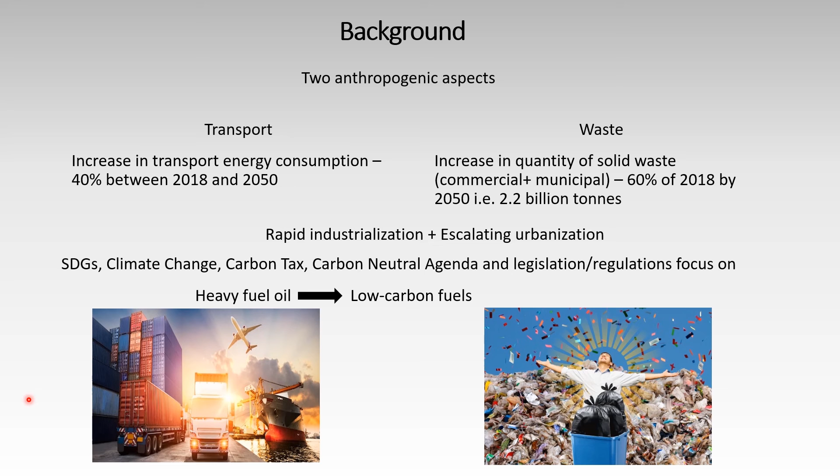Transport energy consumption. The figure shows the energy consumption by different sectors. As you can see, the second largest user of energy is the transport sector, consuming more than one quarter of the global energy.

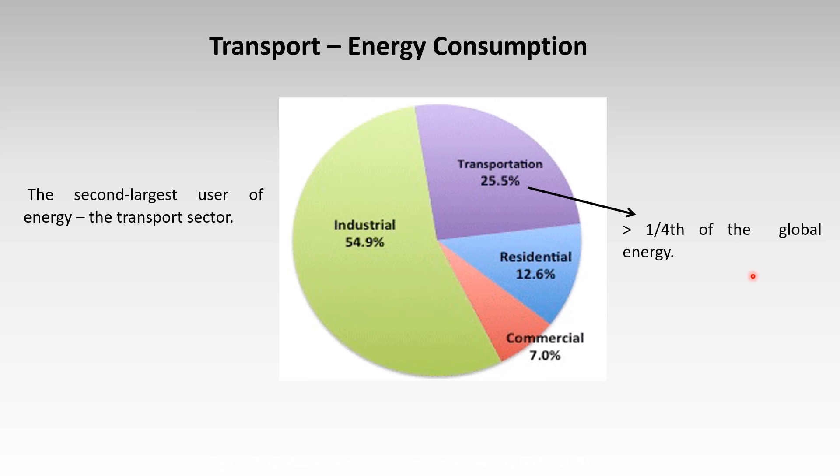Transport energy sources. This figure shows global transportation sector delivered energy consumption by energy source between 2010 and 2040. As you can see, the majority of transport's power is met by these unsustainable compounds.

This is set to increase by 30 British thermal units between 2020 and 2040. Here you can see the difference of 30 British thermal units, this is 2020 and 2040, and here is the different slice.

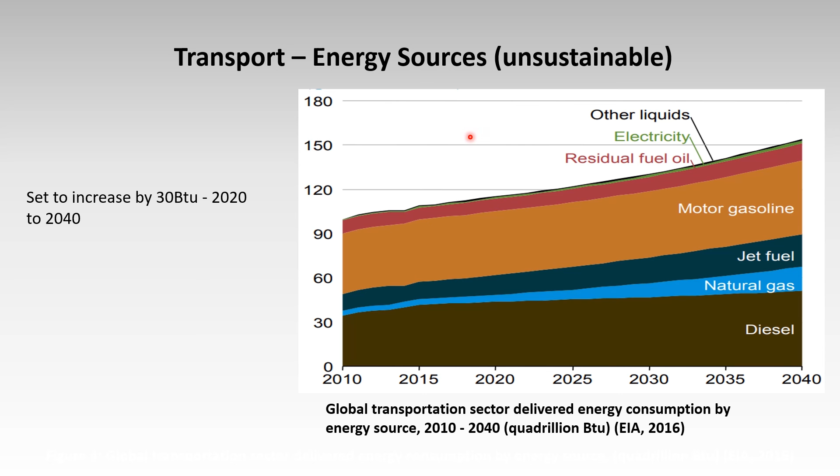Waste footprint for 2016: 2.01 billion tons of solid waste were generated, amounting to a footprint of 0.74 kilogram per person per day.

Here is the rate of waste increase. The 1.3 billion tons of waste produced per year continues to rise with the increase of global population.

In low-income countries, 90% of the waste disposal is unregulated, openly dumped or openly burnt, and such practices create serious health, safety and environmental consequences.

Solid waste energy. Here is a typical incinerator. You can see that incinerators can reduce the mass of solid waste by 80 to 85%, and the volume of solid waste by 95 to 96%.

And yet recover energy from the waste as well. The net calorific value of typical solid waste ranges from 4 to 35 megajoules per kilogram.

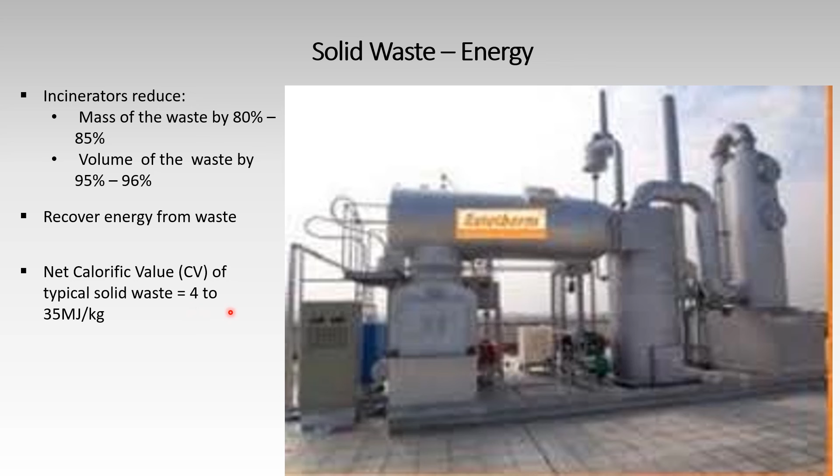This is the schematic of solid waste incineration. Here is the bunker, where waste is dumped. Firing grate, incineration happens here. The boiler, where water boils, and then steam enters into turbo alternators and then transfers into another chamber and converts into electrical energy.

At the bottom you can see ashes and metals, the byproducts of incineration. We will discuss their fate later in the presentation. This is the separation particle chamber, where separation of gases and vapors happens, and then they find their way out of the stack.

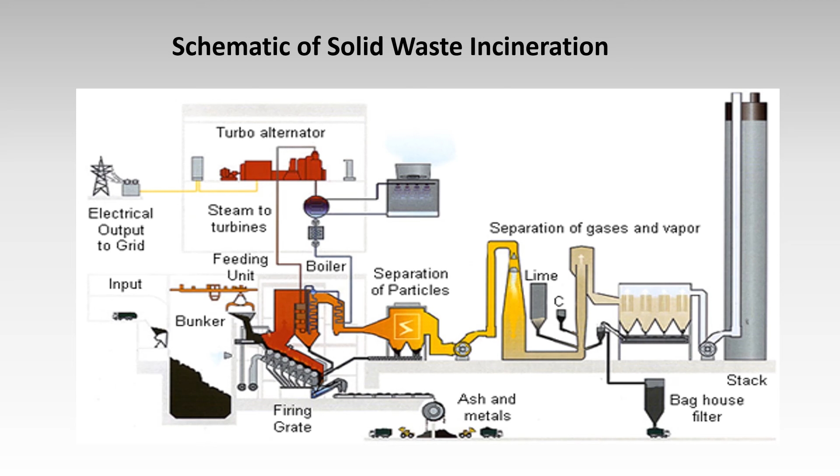Problematization and knowledge gap. As we have seen, the transport sector consumes energy. Waste can yield energy if incinerated.

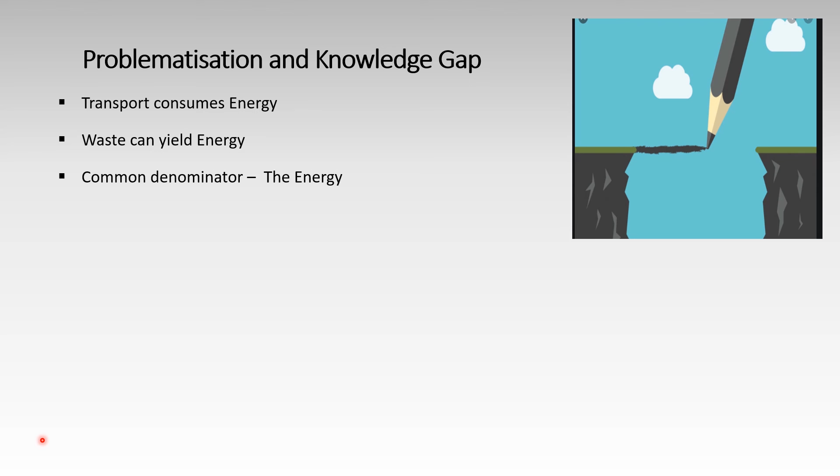The common denominator between the two is energy. So the idea of tying the two sectors, transport and waste, together via the thread of energy seeks attention. So the point is, can something be done here?

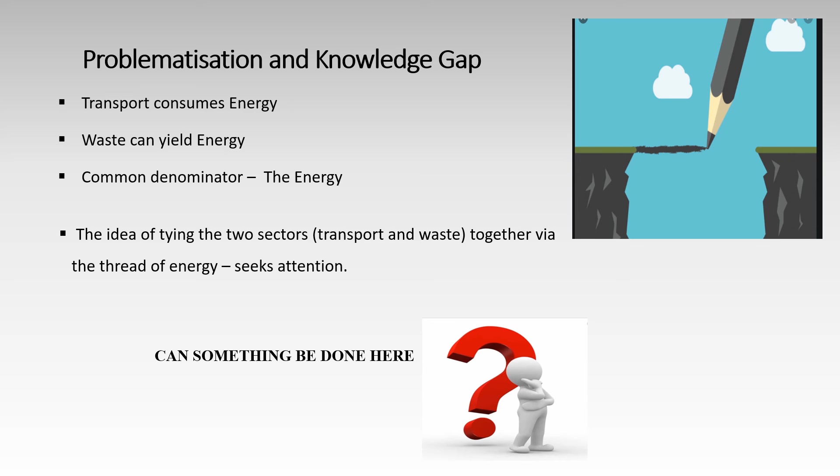Here is the aim: the coupling of the two sectors, transport and waste, with the one stone being energy—thus killing two birds, transport and waste, with one stone.

Objectives: the aforesaid aim has been achieved by the following objectives. Firstly, establish or outline the potential of combining the three sectors, waste, energy and transport. Then create an account of advantages and challenges of the combination. Further, investigate the combination via the lenses of sustainability, sustainable development goals, and climate change.

The innovative idea: waste incineration, energy as an output, energy as an input in the transport sector. You can see one sector can yield energy, that is the waste, and the other sector needs energy, that is transport. So we can put these two sectors together into a relationship via output and input of energy.

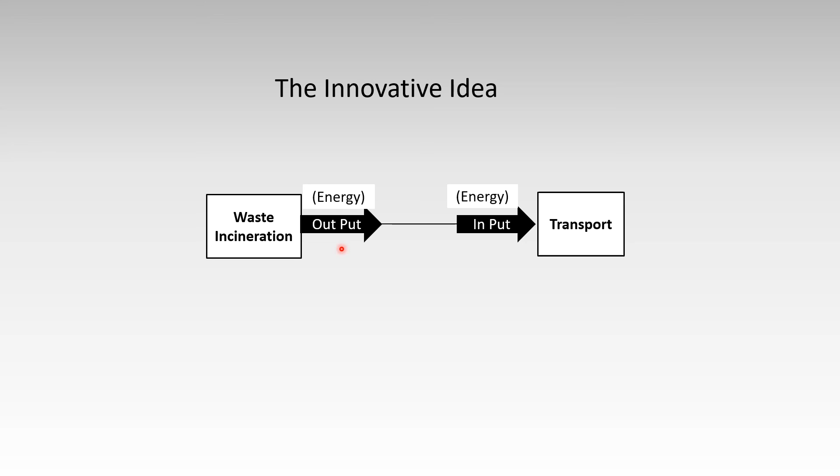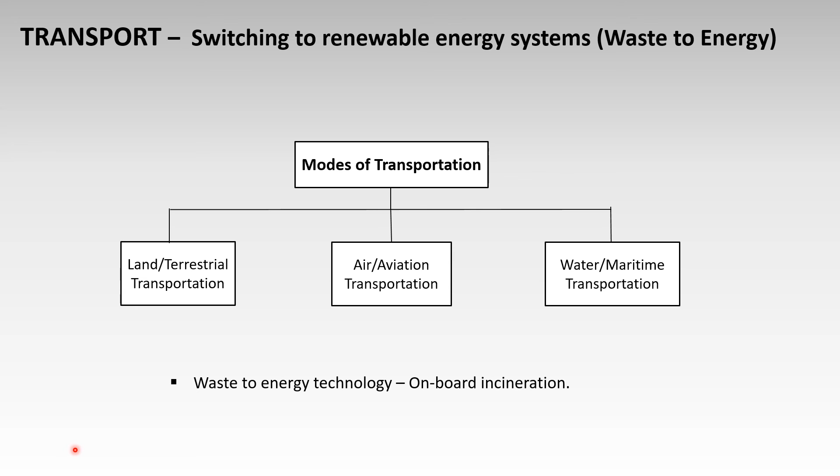Transport: switching to a renewable energy system. There are three modes of transportation: air or aviation, land or terrestrial transportation, and water or maritime transportation. Waste to energy technology can be applied by onboard incineration. The practical feasibility is that the gigantic waste incinerator can be well accommodated on a maritime vessel's deck, as they are huge in size. That is, maritime transportation is the focus of this study.

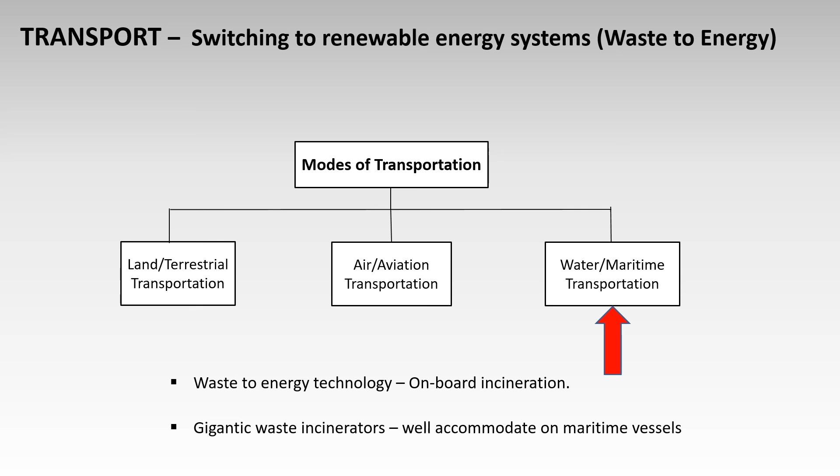In maritime transport, onboard incineration is more feasible, and that incineration can power maritime vessels to propel the vessels and to power the onboard built environment. At the same time, we can replace fossil fuel by waste to energy.

Waste, energy, transport—the WET nexus. You can see the three sectors are interrelated with each other. They are overlapping in a way that energy released from the waste is entering into the transport sector. This is the space and area where the three sectors are merging. So the purpose of our study is to establish that nexus, the WET nexus, to attain sustainability in the three sectors.

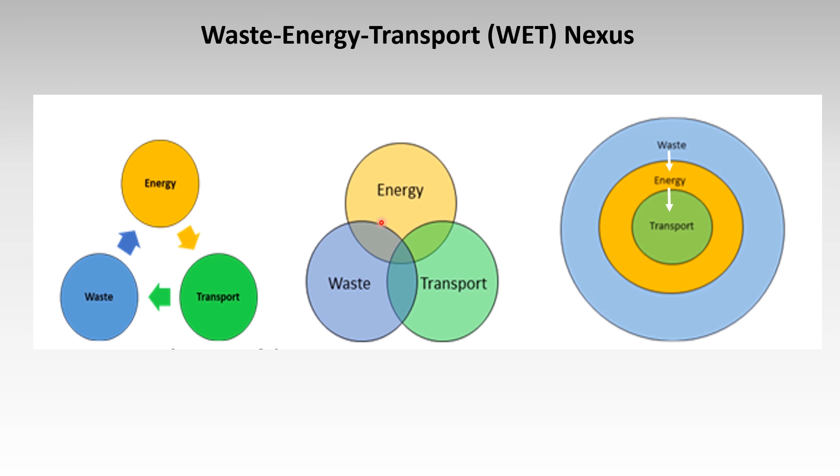Challenges and future research areas: we can see the net calorific value of solid waste varies from 4 to 35 megajoules per kilogram. So there is a need to hybridize this waste to energy technology with others like wind and solar, and we must have some backup of fossil fuel just to ensure the continuity of travel. We may replace fossil fuel engines by waste incineration engines.

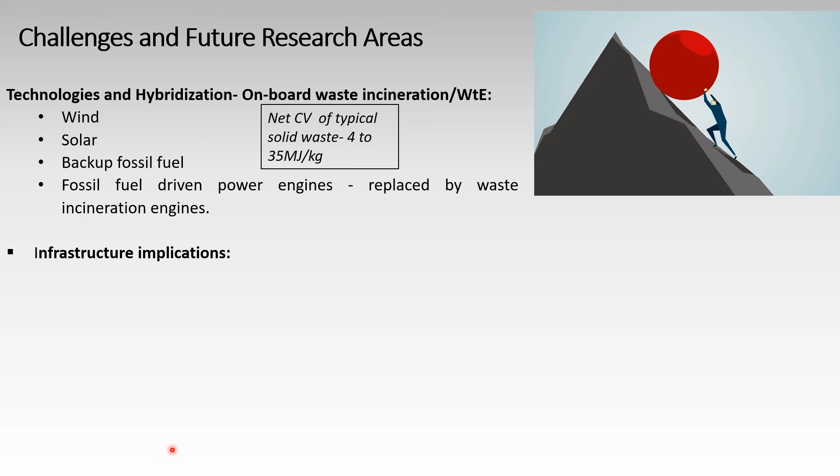Infrastructure implications: there are some areas where further research can be done to figure out the possibility of this nexus, like onboard and offboard waste storage, waste collection, waste contamination, waste segregation in terms of good calorific value, transfer stations at harbors, waste odor control, and boarding waste on maritime vessels—for example, moving grate design to transport the waste to their destinations, etc.

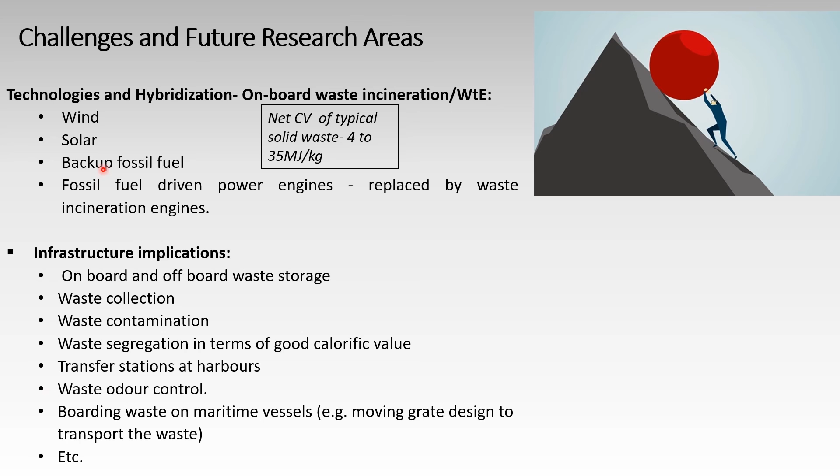In economic feasibility, we can develop numerical estimation models, for example to establish the potential of this nexus at local, national, and international levels. Environmental implications include using carbon reduction technologies like carbon capture and storage, combined heat and power plants, and the ashes from the incinerator can be reused as a construction material.

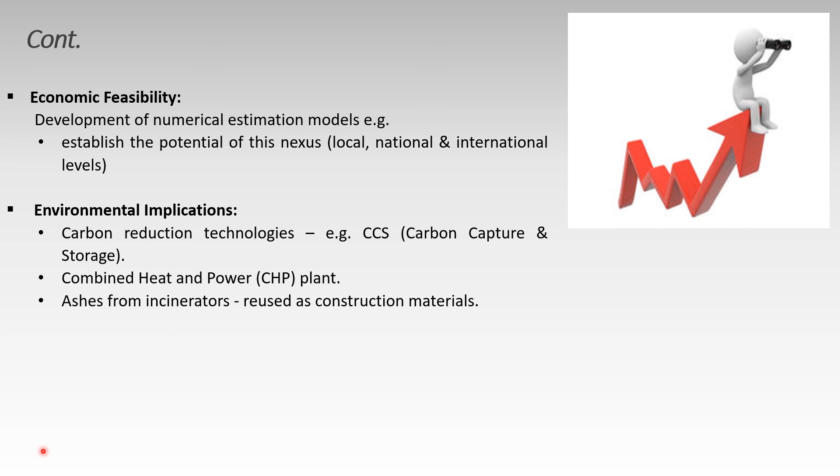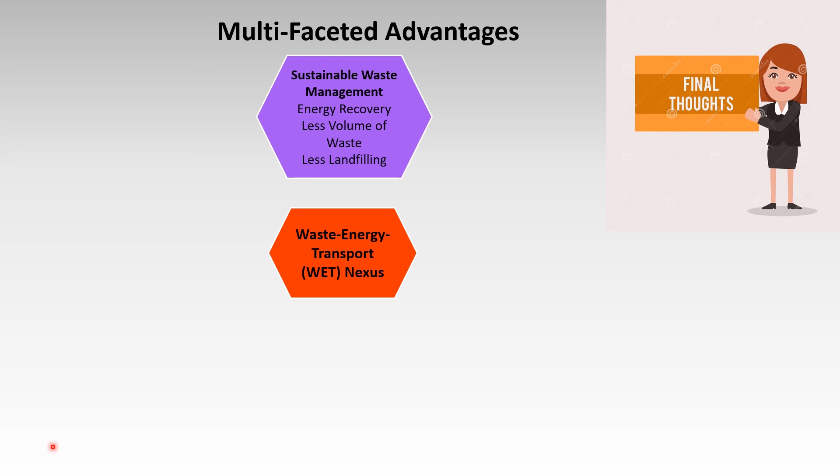Multifaceted advantages: the final thought of the waste energy transport nexus is that it may help in many areas. For example, sustainable waste management includes energy recovery, less volume of waste, and less landfilling. Environmental sustainability includes reduction in fossil fuel driven carbon footprint, less methane emission, and other greenhouse gases.

Sustainable development goals like climate action, air quality, and urban sustainability. In social sustainability, this includes the Climate Change Act, Net Zero Carbon Agenda, and environmental legislation. In economic sustainability, this includes fuel cost, carbon tax, etc. Others include prolonged fossil fuel reserves, reduced environmental impact of cities, and human health.

In summary, this nexus potentially has multi-dimensional benefits.